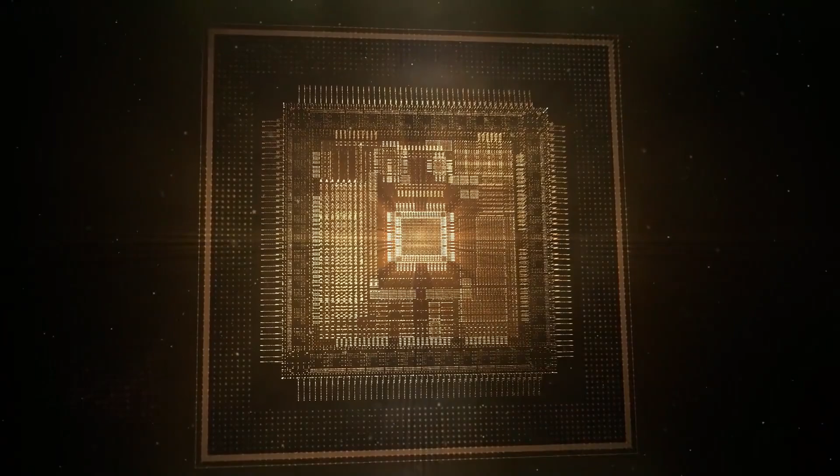Ronnie Chatterjee is one of 130 Indian White House advisors and government officials appointed by Biden after taking office. Previously, he was a professor of business policy at Duke University and served as a senior economics advisor in the Obama administration. It should be said that Chatterjee did show a certain level of professionalism, at least when not dealing with China's internal issues in the United States.

After being appointed as a White House advisor by Biden, the first big thing he took over was dealing with congestion at U.S. ports in 2021. Chatterjee handled this tricky task well, working with the U.S. Department of Transportation and commercial companies, and port congestion was alleviated within months. But Chatterjee's ability may be limited when it comes to dealing with China's internal issues in the United States—when formulating the chip bill, it showed a confusing level of professionalism.

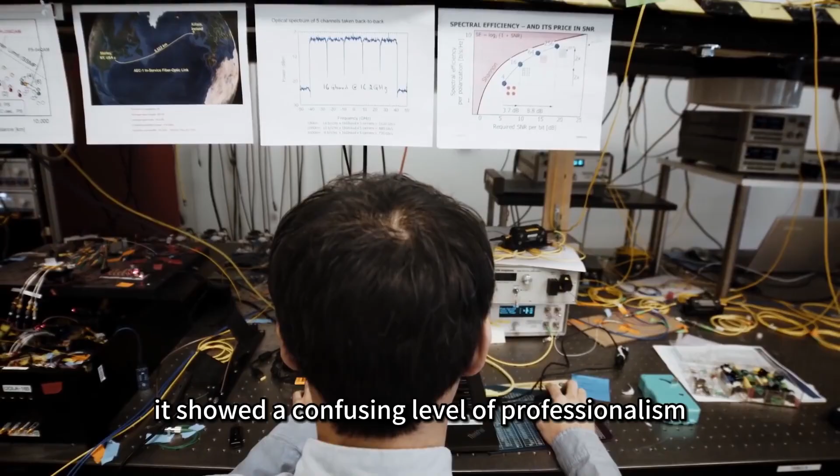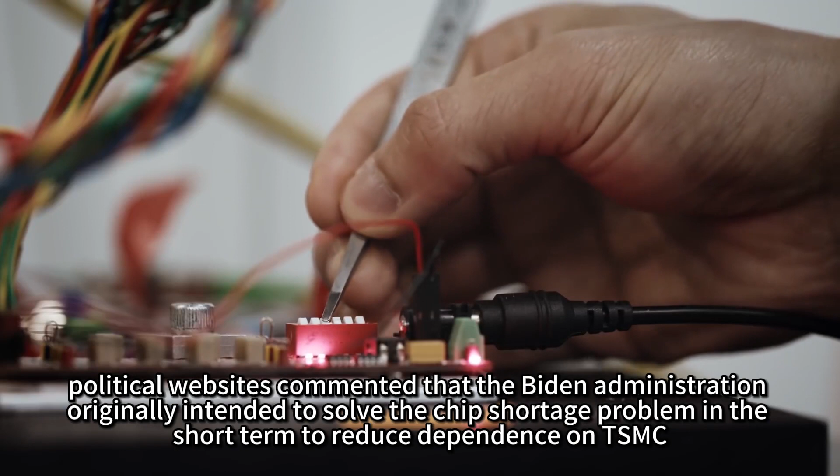There's no need to go into detail on the content of the U.S. CHIPS and Science Act. It mainly forces global chip manufacturers, especially TSMC, to build factories in the United States, and prohibits investment in mainland China. Political websites commented that the Biden administration originally intended to solve the chip shortage problem in the short term to reduce dependence on TSMC. However, in the bill formulated by Chatterjee, it turned into a bet on American manufacturing. Moreover, the bill forces TSMC to move to the United States, which not only angers mainland China, but also becomes a political burden for the United States.

But the problems with Chatterjee's chip bill don't end there. Biden signed the bill very quickly, but the bill had no effect. If chip manufacturers could successfully invest and build factories in the United States, it would be a political achievement for Biden. However, reality contradicted the bill's expectations. Chip giants such as TSMC, Samsung and Intel have invested in and built factories in the United States as required, and the U.S. Congress has also approved $52 billion in subsidies.

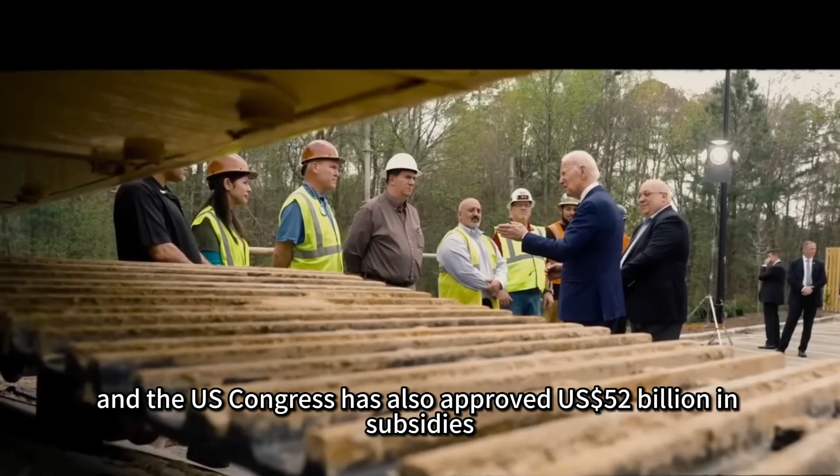However, these U.S. factories have never been able to recruit enough industrial workers. Previously, TSMC's chairman complained in an interview with U.S. media that due to the lack of a large number of skilled semiconductor equipment workers at TSMC's Arizona factory, the startup of the factory may have to be delayed until 2024 or 2025. TSMC has empty factory equipment and no workers in the United States.

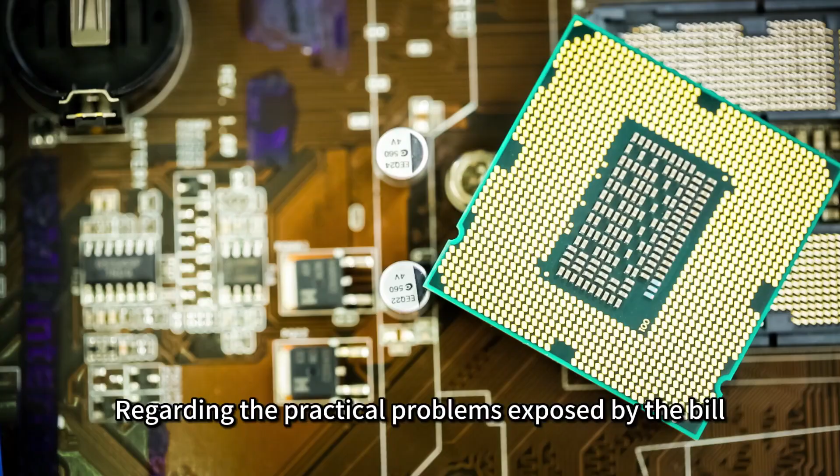In addition, the TSMC chairman also made it clear that although TSMC is investing in building factories in the United States, it will be extremely difficult to replicate another TSMC in the United States. At the end of July, data released by the American Semiconductor Association also confirmed this statement. Data show that by 2030, the number of jobs in the U.S. chip industry will increase to 115,000, but there will be as many as 67,000 vacant positions, a vacancy rate of 58%.

Regarding the practical problems exposed by the bill, Chatterjee has previously admitted that the U.S. chip industry lacks enough industrial workers. He said that everyone hopes that things will get on track, but this is easier said than done.

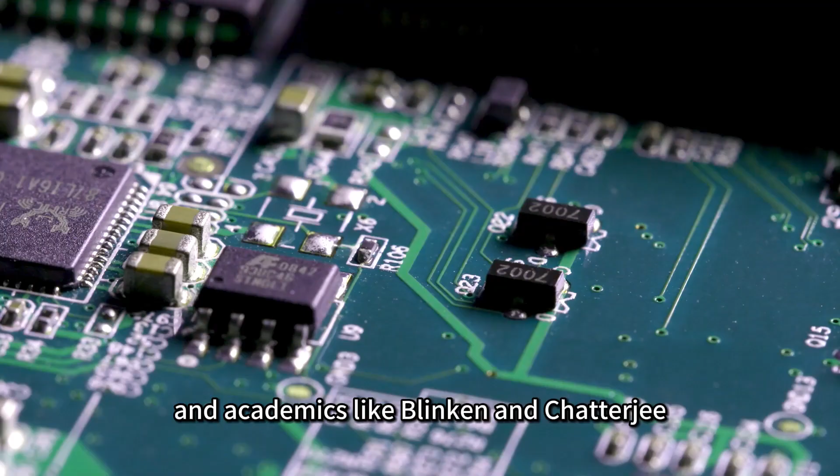In many governments, there are consultants like Chatterjee who do not understand China, pretend to be China experts, and formulate China policies. The most famous is one who cannot even speak Chinese, Zhang Jiadun, who has become a guest of four U.S. governments thanks to street stall literature. As I said before, those who advised the U.S. government during the Cold War were geopolitical masters such as Brzezinski and Kissinger. But who advises the U.S. government now? Charlatans like Bannon and Zhang Jiadun, and academics like Blinken and Chatterjee. This is why it is said that the strategic vision of the U.S. government is getting worse day by day.

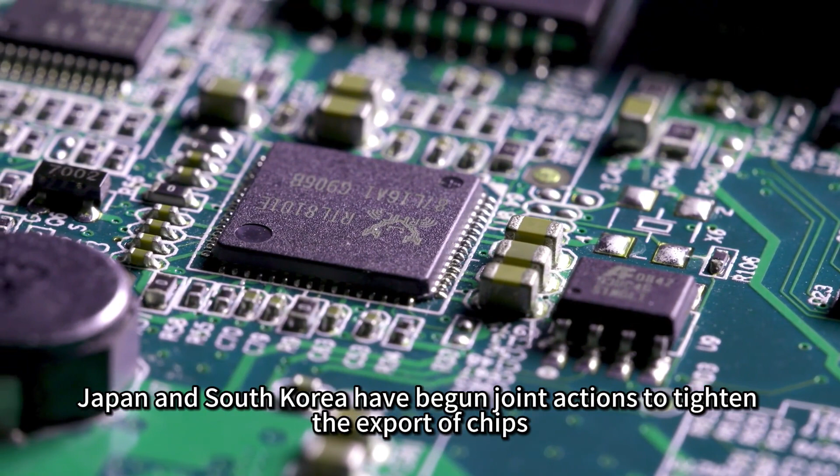Recently, the United States, Japan and South Korea have begun joint actions to tighten the export of chips, semiconductor equipment, materials and other products, with the purpose of hindering the development of China's semiconductor industry. However, it is precisely because of their suspension of supply that Chinese scientists have been determined to conduct self-research and are breaking the relevant technology blockade one by one.

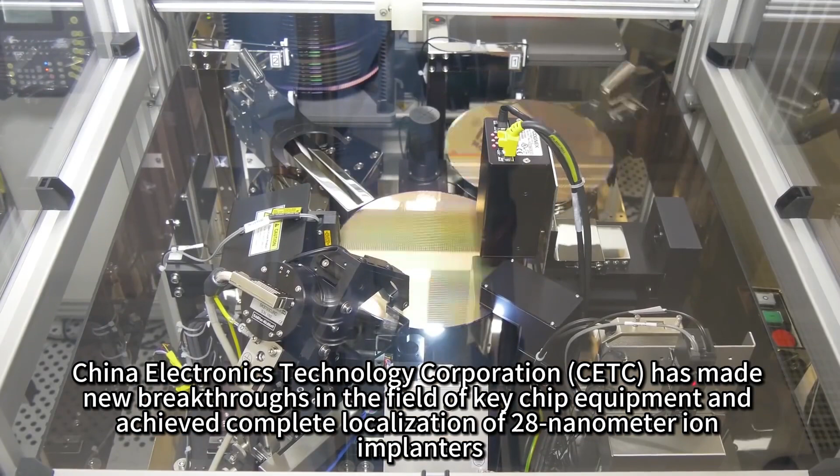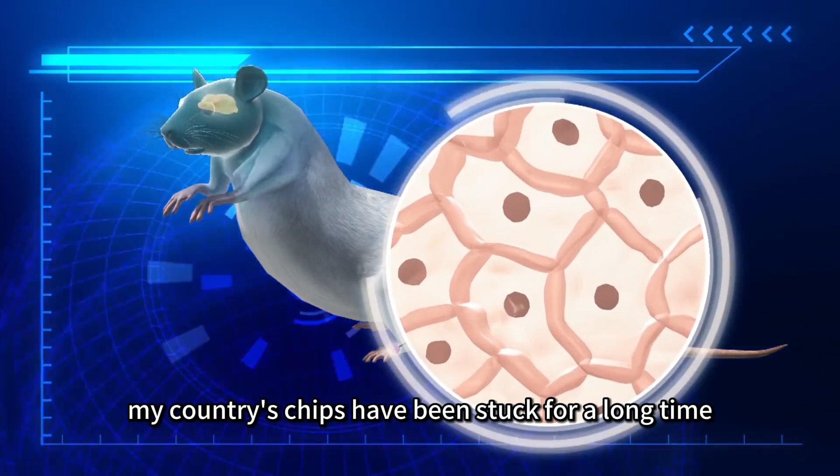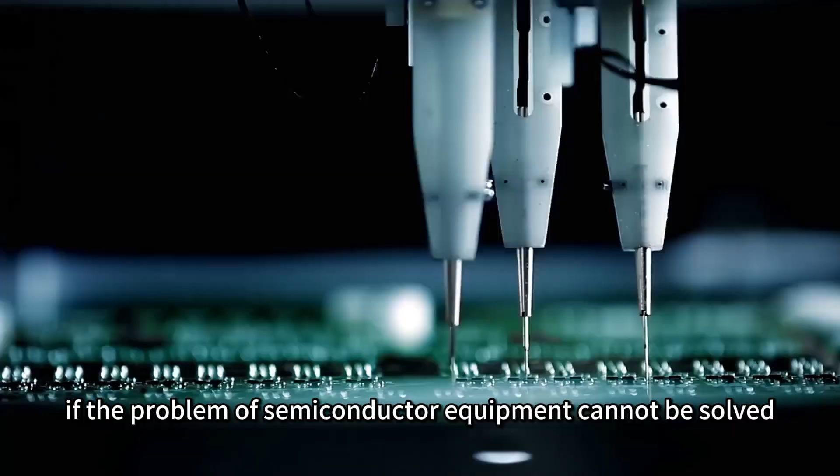Recently, China Electronics Technology Group Corporation (CETC) made new breakthroughs in key chip equipment, achieving complete localization of 28nm ion implanters. On June 29th, CETC announced it had achieved full coverage of the 28nm process for ion implanters. As we all know, my country's chips have been stuck for a long time due to the lack of manufacturing equipment, and we are still unable to mass-produce chips with 7nm and below processes. The recent restrictions imposed by the United States and Japan on semiconductor equipment exports have made things even worse. To put it bluntly, if the problem of semiconductor equipment cannot be solved, domestic chips will stop at 45 nanometers. So the question is, as domestic semiconductor equipment continues to make breakthroughs, how far is it from mass production of 28 nanometer chips?

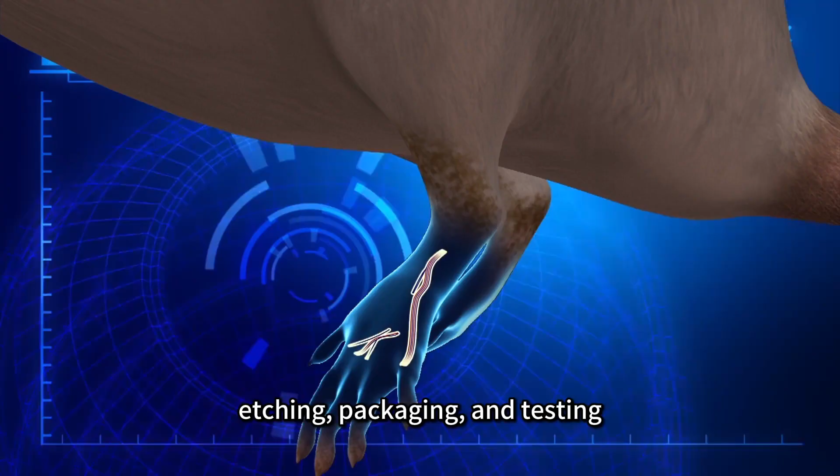How important is semiconductor equipment? A chip goes through hundreds or even thousands of steps from silicon sand to finished product. Simply put, this includes acidification, purification, crystal growth, slicing, polishing, cleaning, glue coating, drying, photolithography, etching, packaging, and testing. These steps require hundreds of types of equipment, among which 9 core equipment are most critical, in order: photolithography machine, etching machine, ion implanter, chemical vapor deposition equipment, chemical mechanical polishing machine, metal evaporation equipment, thin film deposition equipment, cleaning equipment, and testing equipment. To put it bluntly, if any of these equipment types are missing, let alone manufacturing chips, the entire production line will be paralyzed. However, such important equipment is basically monopolized by the United States, Japan, and the Netherlands.

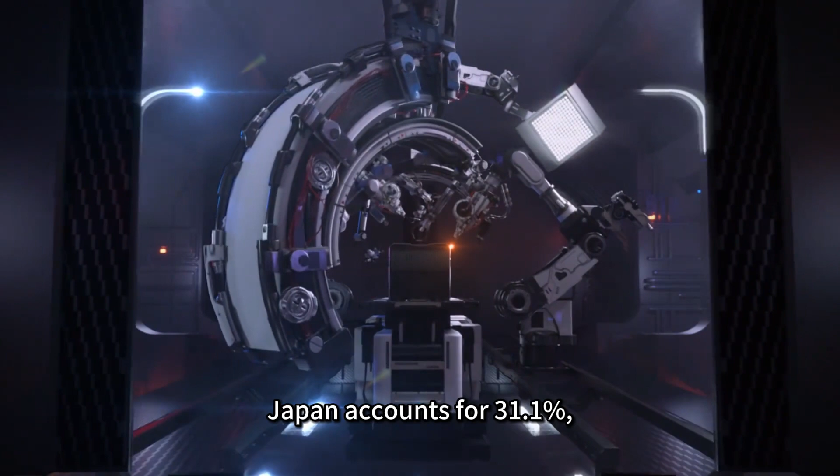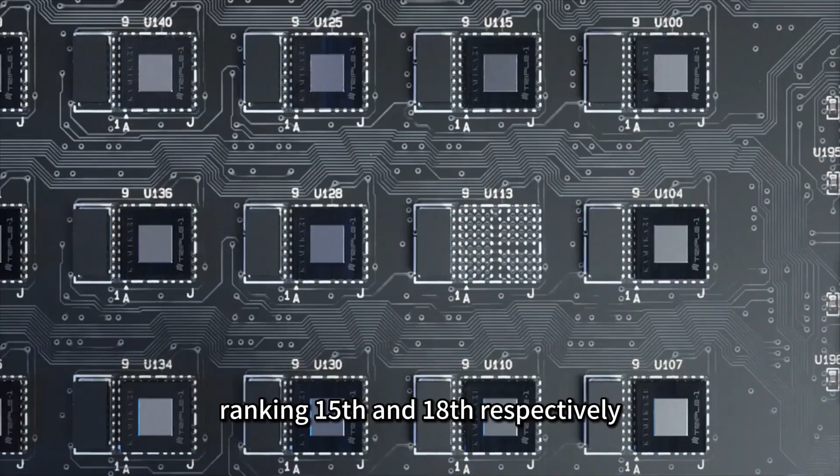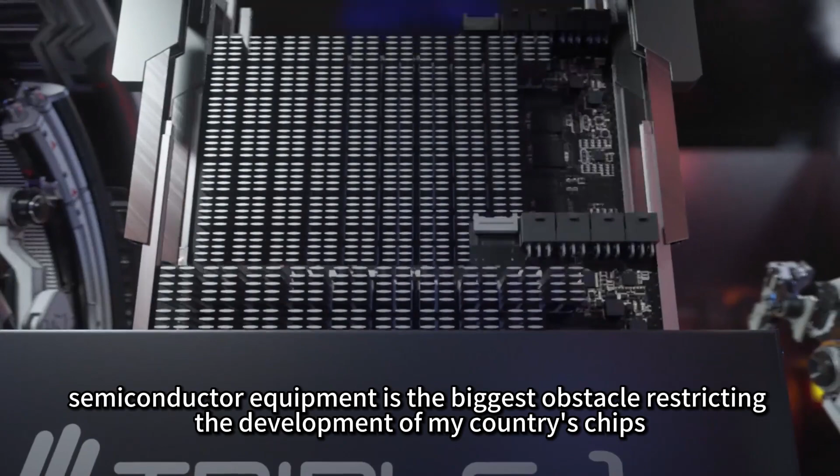Relevant data shows that in the global semiconductor equipment market, the United States accounts for 41.7%, Japan accounts for 31.1%, and the Netherlands accounts for 18.8%. The three collectively control 91.6% of the market share. Among the top 20 semiconductor equipment manufacturers in the world, the top 14 are all overseas companies. Among Chinese companies, only ASMPT and Northern Huachuang are shortlisted, ranking 15th and 18th respectively. Domestic chips are the most backward in terms of equipment. According to the barrel effect, semiconductor equipment is the biggest obstacle restricting the development of my country's chips. To solve the problem of stuck chips, we must first solve the problem of semiconductor equipment. With this premise in mind, let's talk about the 9 core devices.

Again, in the global semiconductor equipment market, the United States accounts for 41.7%, Japan accounts for 31.1%, and the Netherlands accounts for 18.8%, together controlling 91.6% of the market share. Among the top 20 semiconductor equipment manufacturers, the top 14 are overseas companies: Applied Materials of the United States, ASML of the Netherlands, Tokyo Electron of Japan, and Lam Research of the United States are at an absolute advantage. Only ASMPT and Northern Huachuang are shortlisted among Chinese companies, ranked 15th and 18th respectively. The entire chip field includes design, manufacturing, packaging, testing, EDA, equipment, materials, applications, etc. Domestic chips are most backward in terms of equipment. According to the barrel effect, semiconductor equipment is the biggest obstacle restricting the development of my country's chips. To solve the chip stuck-neck problem, we must first solve the semiconductor equipment problem.

With this major premise in mind, we can talk about the 9 core devices. First, the lithography machine. The lithography machine is the core of the core, with a utilization rate of 24% in the manufacturing process. Its classification is as follows.

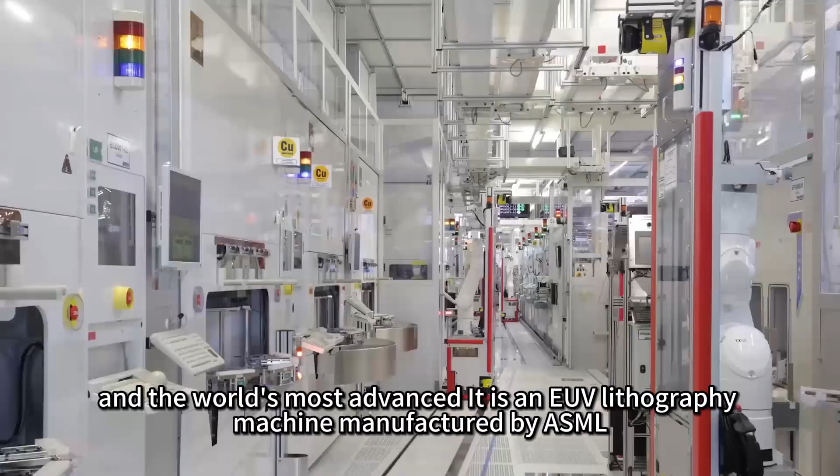The domestic lithography machine currently available is the 90 nanometers lithography machine produced by Shanghai Microelectronics, and the world's most advanced is an EUV lithography machine manufactured by ASML. Calculated according to the chip manufacturing process, the difference between the two is 6 generations. Calculated according to time, the difference is 28 years.

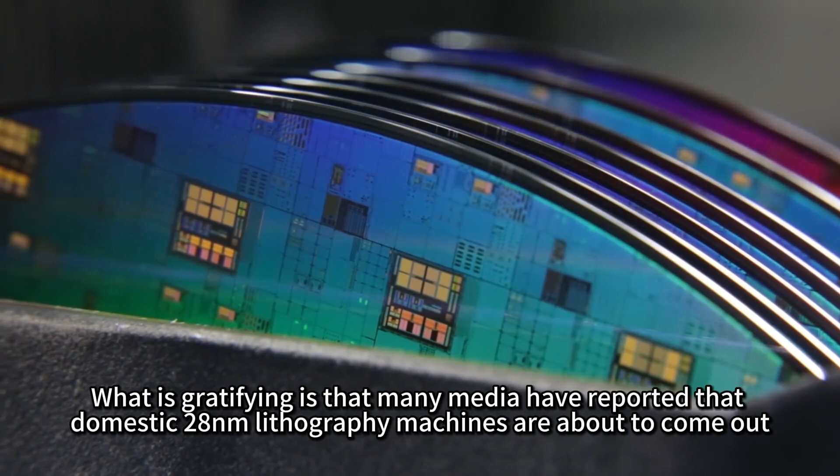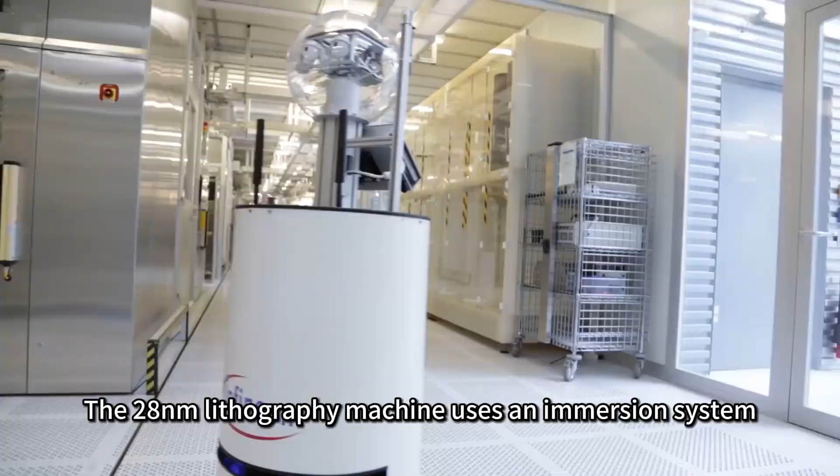What is gratifying is that many media have reported that domestic 28 nanometers lithography machines are about to come out, and sample machines have even been produced. The 28 nanometers lithography machine uses an immersion system, equivalent to ASML's ArFi lithography machine, but the resolution can currently only reach 28 nanometers. Its key components are all manufactured by domestic companies.

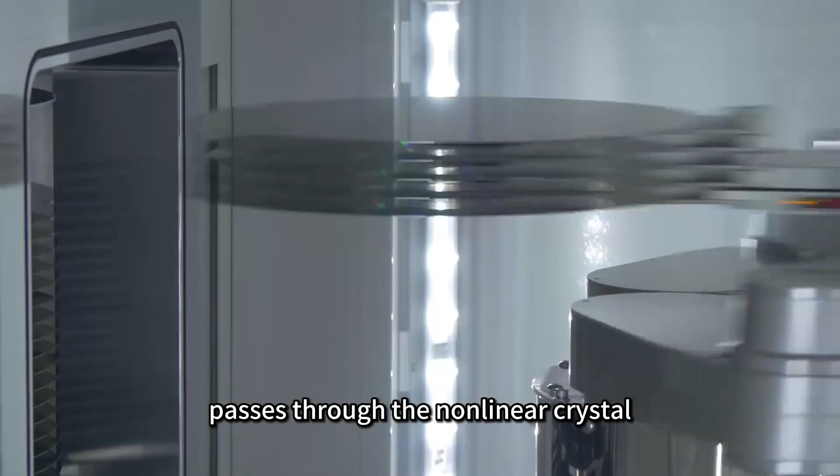Light source, built by Beijing Keyi Hongyuan, based on the ArF excimer laser, obtains 579 nanometers fundamental frequency light, passes through the nonlinear crystal, obtains 289.5 nanometers frequency doubled laser, and further obtains 193 nanometers tripled ultraviolet laser.

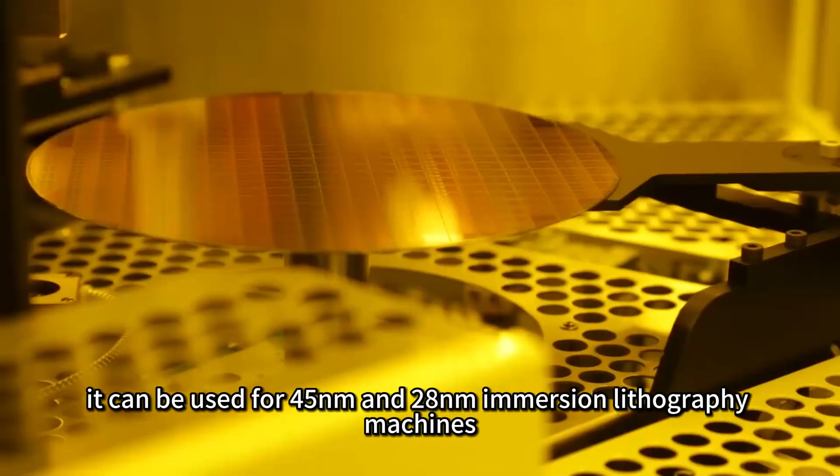Dual workbench, jointly built by Tsinghua University and Huazhuo Precision Technology, can be used for 45 nanometers and 28 nanometers immersion lithography machines. It can be used for processes below 14 nanometers and 7 nanometers after future upgrades.

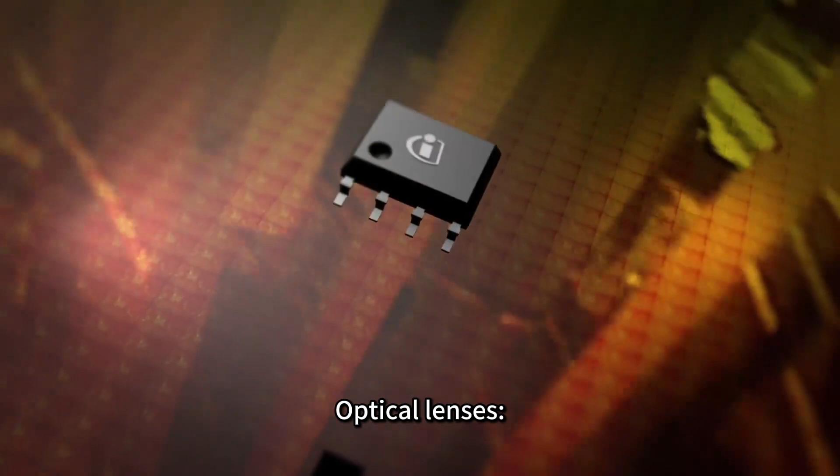Immersion system, built by Zhejiang Qier Electromechanical, its precision is second only to ASML and Japan's Nikon. The temperature stability error reaches 0.001 degrees, in line with international advanced level, meeting 28 nanometers lithography technology requirements. Optical lenses, manufactured by the Changchun Optics Machinery Institute of the Chinese Academy of Sciences, fully meet the requirements of the 28 nanometers lithography machine, but there is still a huge gap with Zeiss.

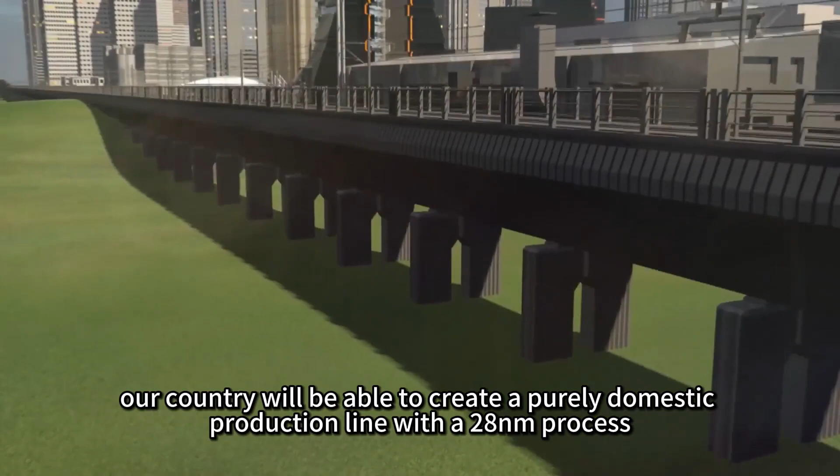If the 28 nanometers lithography machine breaks through, our country will be able to create a purely domestic production line with a 28 nanometers process. Don't underestimate the 28 nanometers process.

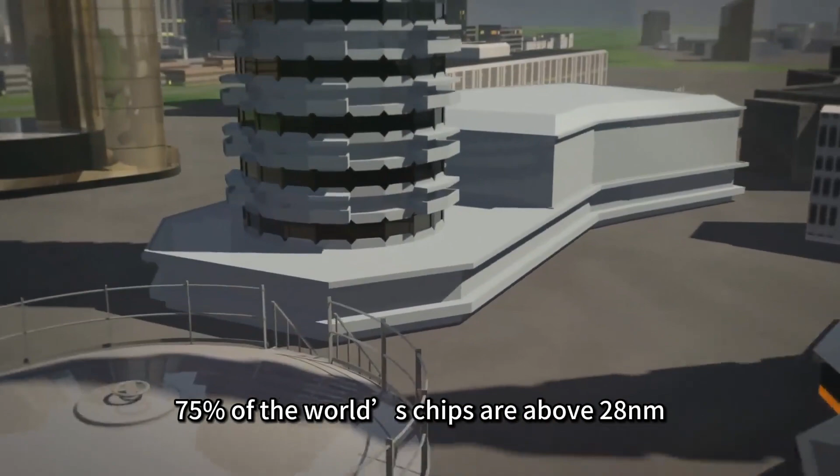Currently, 75% of the world's chips are above 28 nanometers. Only a small number of scenarios such as smartphones, supercomputers, and high-end GPUs pursue 7 nanometers or below. The value of my country's chip imports every year reaches 2.8 trillion yuan, accounting for more than 70% of global chip sales. In order to obtain this part of the profits, the United States continues to restrict and suppress China.

If we raise the level of technology to a higher level, the effect of the game will be very different. Assuming that in 2025, we can build a purely domestic 7 nanometers production line, the chip game will become chip cooperation. The second, etching machine: the photolithography machine is the weakest link in my country's semiconductor equipment, and the etching machine is the strongest link.

Domestic etching machines have reached a replacement rate of 30%, represented by companies such as China Micro Semiconductor and Northern Huachuang. At present, the etching machines produced by China Micro Semiconductor have reached the 5 nanometers level, and the company's products have been successfully supplied to TSMC, the leading chip OEM.

Being recognized by TSMC is equivalent to obtaining a global license. At present, China Micro Semiconductor has begun the research and development of 3 nanometers equipment, and is bound to win the first place in the world. However, the embarrassing thing is that China Micro Semiconductor does not have much profit.

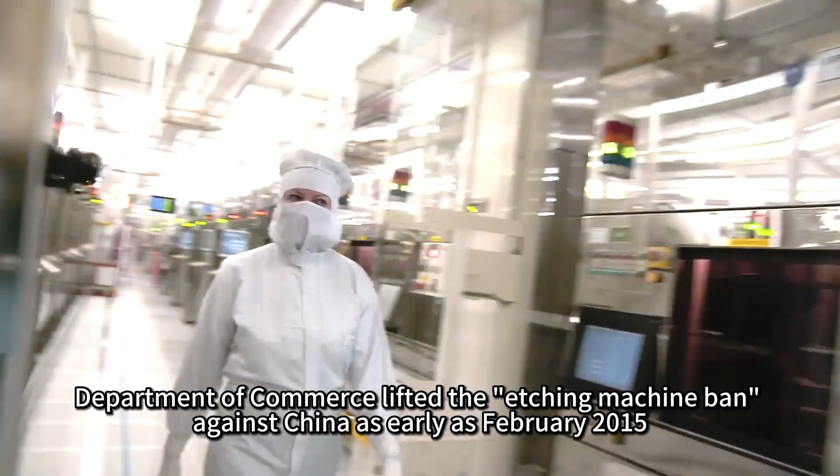Because the U.S. Department of Commerce lifted the etching machine ban against China as early as February 2015. The reason is that China has actually obtained etching equipment from Chinese companies equivalent in quantity and quality to American products, making it meaningless to continue national security export control measures. After the ban was lifted, many manufacturers still chose overseas equipment as more suitable. This has also resulted in the global share of AMEC being only 1.4%.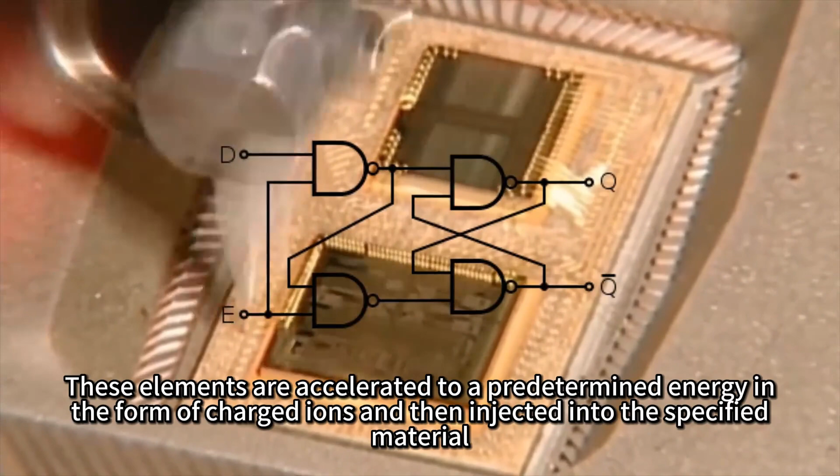The third one is the ion implanter. During the chip manufacturing process, different types of elements need to be incorporated to change the electrical properties of the material. These elements are accelerated to a predetermined energy in the form of charged ions, and then injected into the specified material. This process requires an ion implanter to perform.

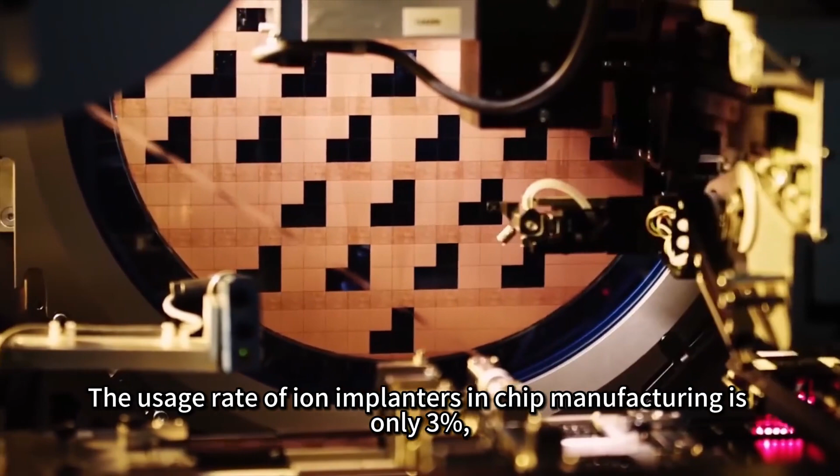The usage rate of ion implanters in chip manufacturing is only 3%, and the market share is only about $2 billion. However, without this 3%, the remaining 97% would be useless. However, in this field, American companies have won 89% of the market share, and have an absolute monopoly. Ion implanters have become the second shortcoming of domestic semiconductor equipment.

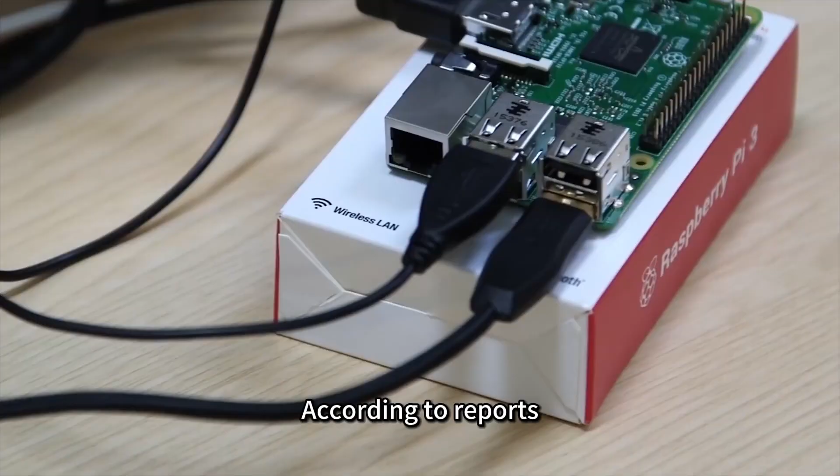Today, good news comes from CETC. The company has achieved full coverage of the 28 nanometers process for ion implanters, according to reports. CETC has continuously made breakthroughs in core technologies of key modules such as optical circuits, control, and software, forming a full range of ion implanters for medium beam, large beam, high energy, and third-generation semiconductors.

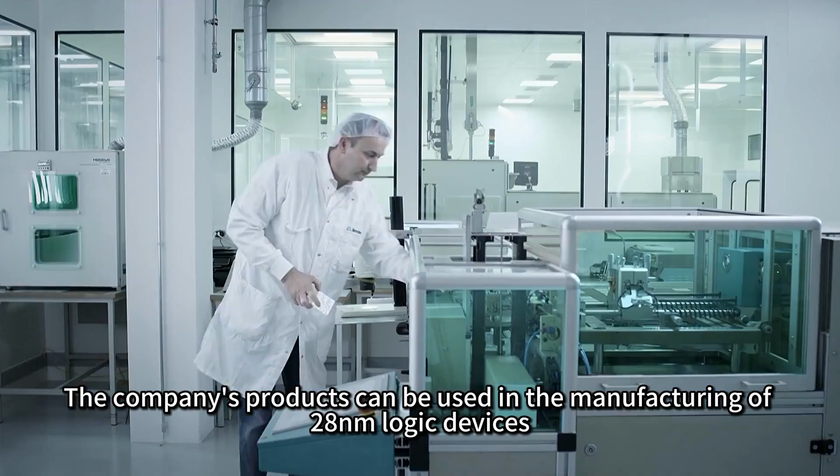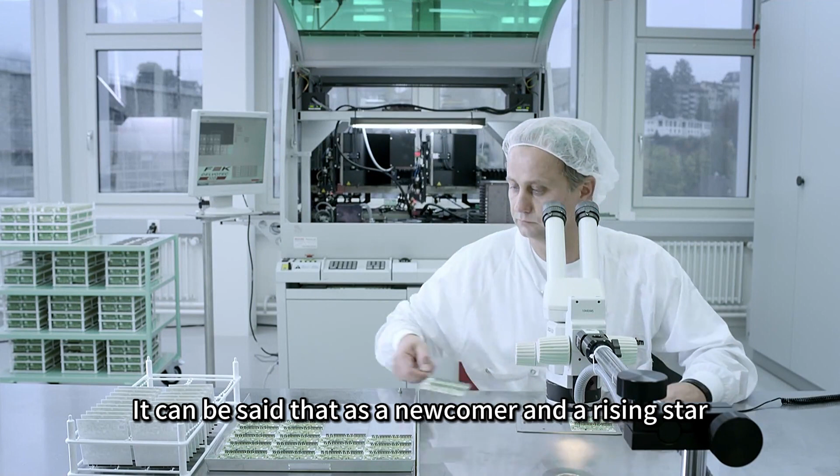The company's products can be used in the manufacturing of 28 nanometer logic devices, memory devices, power devices, sensors, etc., and the cumulative tape-out exceeds 20 million pieces. As a newcomer and rising star, it is very rare to break through 28 nanometers.

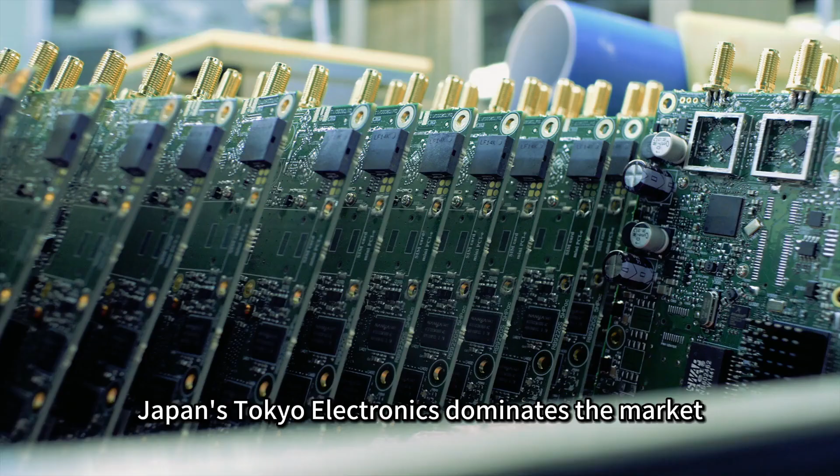Although there is no market share, at least the stuck neck of mature processes has been solved. The fourth is the glue coating developing machine, mainly used for photoresist coating and development of photolithography patterns. It uses a robotic arm to complete photoresist coating, curing, development, film hardening and other processes of the wafer. It directly affects the subsequent exposure quality of the circuit, and also has a profound impact on etching and ion implantation. In the global market, Japan's Tokyo Electron dominates, occupying 87% of the market share, in an absolute monopoly position.

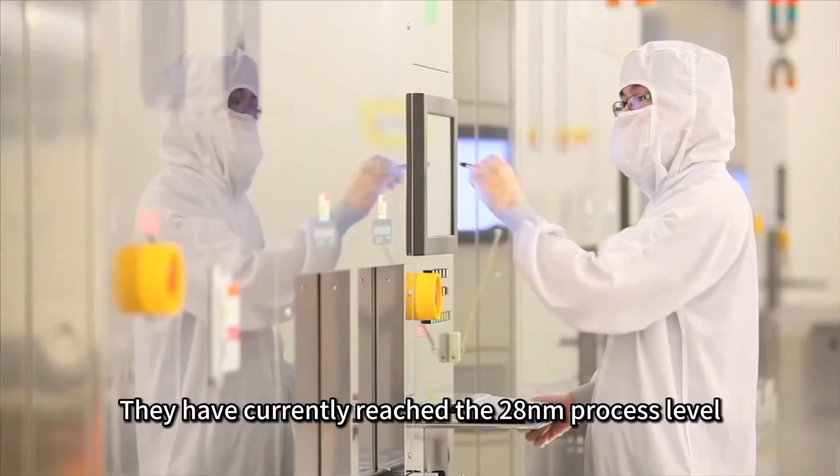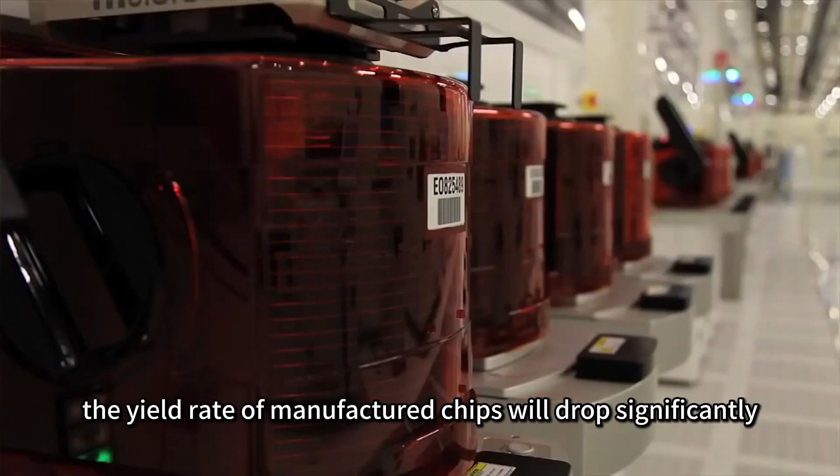Fifth, cleaning equipment. Cleaning equipment must clean away charged ions and metal impurities from the wafer, otherwise the yield rate of manufactured chips will drop significantly. On paper, the cleaning equipment may not look like much, but in fact it is an extremely sophisticated piece of equipment. The precision of the cleaning equipment can reach the nanometer level.

1 nanometer equals 0.000001 millimeter. What impurities will exist in a 5 nanometer gap? You can imagine the difficulty of washing these. Domestic companies mainly include Shengmei Shanghai and Zhichun Technology. These companies have complete industrial chains and advanced technologies, and have basically achieved 50% domestic substitution.

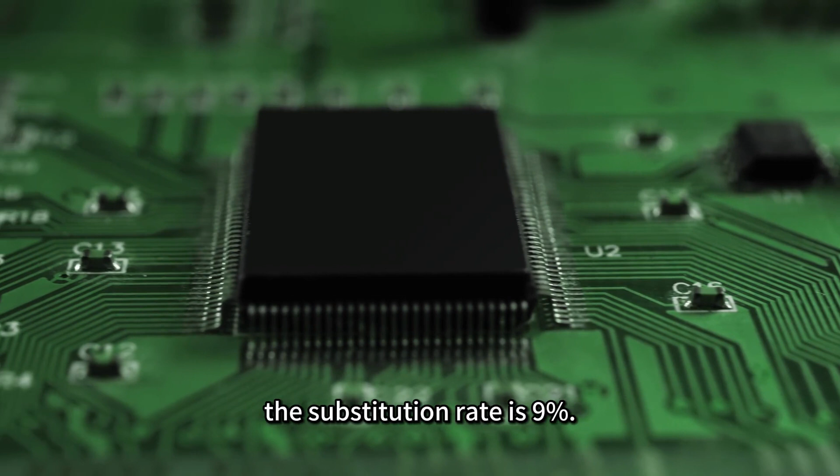Chemical mechanical polishing machine is one of the equipment used to flatten the surface of silicon wafers. It removes uneven parts of the silicon wafer surface through chemical reaction and mechanical friction to form a flat surface. The domestic representative company is Huahai Qingke, with a replacement rate of 20%.

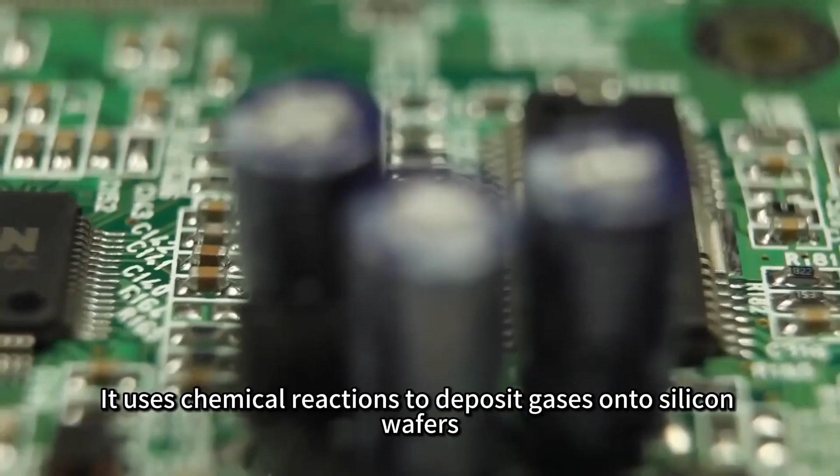Chemical vapor deposition equipment, or thin film deposition equipment, is used to manufacture thin films. It uses chemical reactions to deposit gases onto silicon wafers, forming very thin films. This film can be used to make components such as capacitors and resistors. The process is simple, the application range is wide, the equipment is simple, and the technical requirements are low, but it is polluting. Domestic representatives include Tuojing Technology, Northern Huachuang, and Shengmei Shanghai, with a replacement rate of 13%.

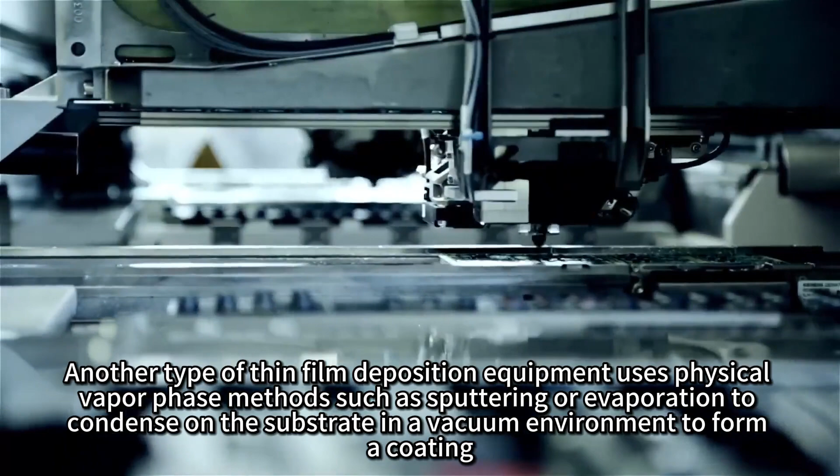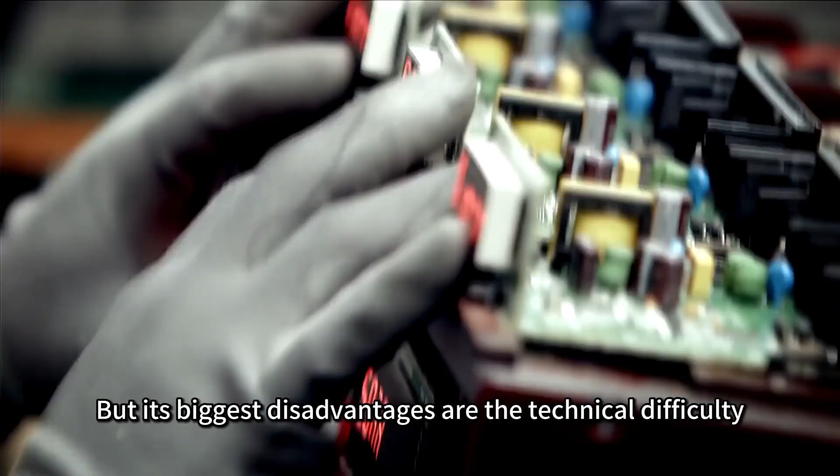Another type of thin film deposition equipment uses physical vapor phase methods such as sputtering or evaporation to condense on the substrate in a vacuum environment to form a coating. This process has the advantages of high hardness and strength, good thermal stability, good wear resistance, stable chemical properties, low friction coefficient, dense organizational structure, and is green and pollution-free. But its biggest disadvantages are technical difficulty, high cost and complex process. Domestic substitution is mainly made by Northern Huachuang, with a substitution rate of 10%.

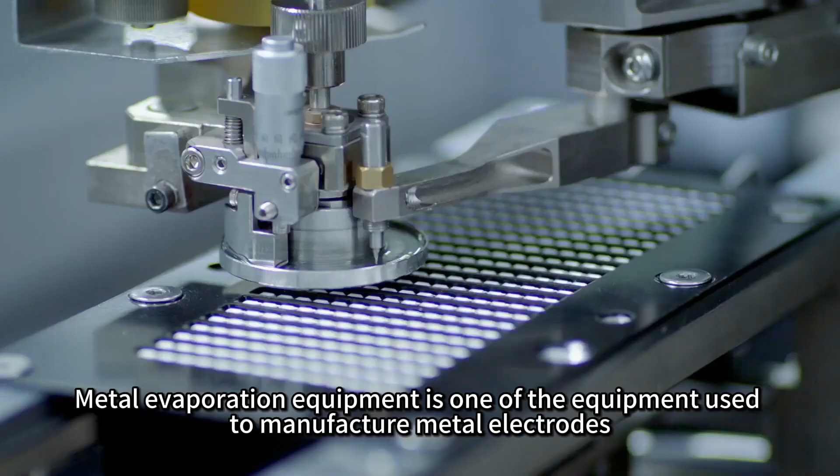Metal evaporation equipment is one of the equipment used to manufacture metal electrodes. It uses high temperatures to evaporate metal onto a silicon wafer to form electrodes. This equipment is very important for making metal electrodes.

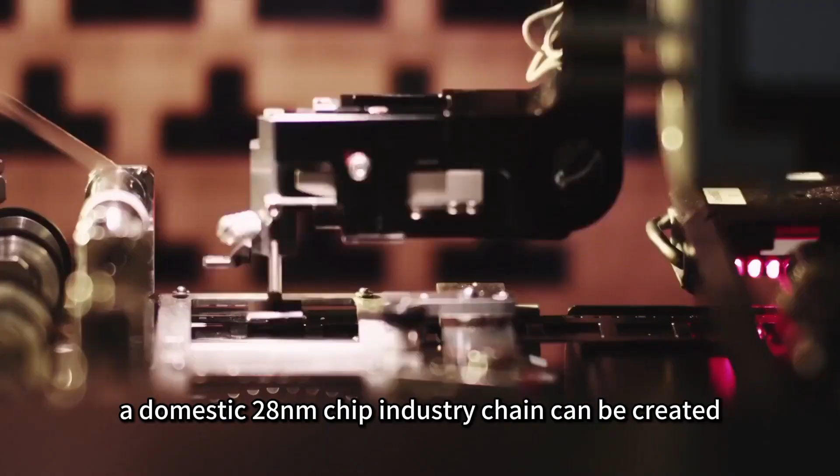Overall, domestic chip equipment replacement rate reaches 80%. As long as the 28 nanometer lithography machine is conquered, a domestic 28 nanometer chip industry chain can be created, right to the end. With the breakthrough of the 28 nanometer ion implanter, only the photolithography machine has yet to break through among the 9 core equipment.

According to market news and the angry remarks of the ASML president, it can be seen that domestic 28 nanometer lithography machines are close to a breakthrough, but this is only the first step in a long march, and it is still far from full success. After all, TSMC has achieved mass production of 3 nanometer chips, while SMIC is still at the 14 nanometer stage.

At the end of last year, TSMC held a 3 nanometer production and expansion ceremony at the Tainan Science Park, officially announcing the launch of 3 nanometer mass production. Previously, Samsung had announced the start of 3 nanometer process production as early as June. TSMC originally planned to officially mass produce in September, but due to some reasons it was postponed to the end of the year.

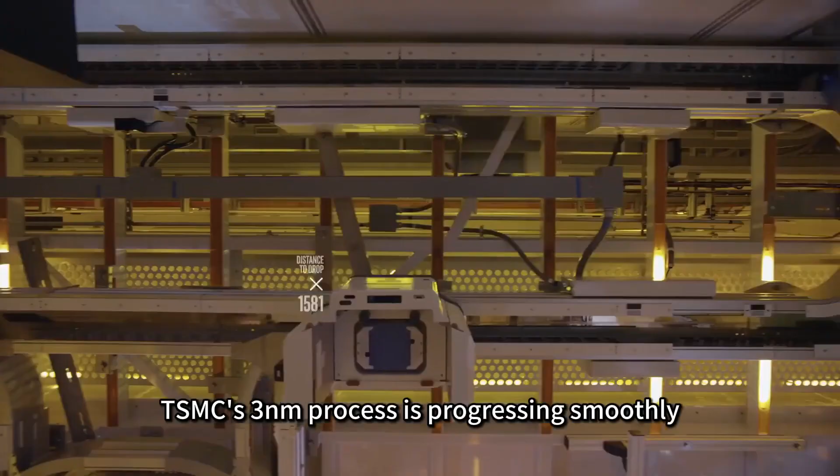Today, TSMC's 3 nanometer process is progressing smoothly, and news about 2 nanometer process technology has also come out. According to reports, Nanke Chip Factory 18 is the production base of TSMC's 5 nanometer and 3 nanometer chips, with phases 5 to 9 being the 3 nanometer production base. According to TSMC President and co-CEO Wei Zhejia's previous statement, TSMC's N3 process progress is in line with expectations and will be mass-produced in the second half of 2022 with a good yield rate, driven by HPC and smartphone-related applications.

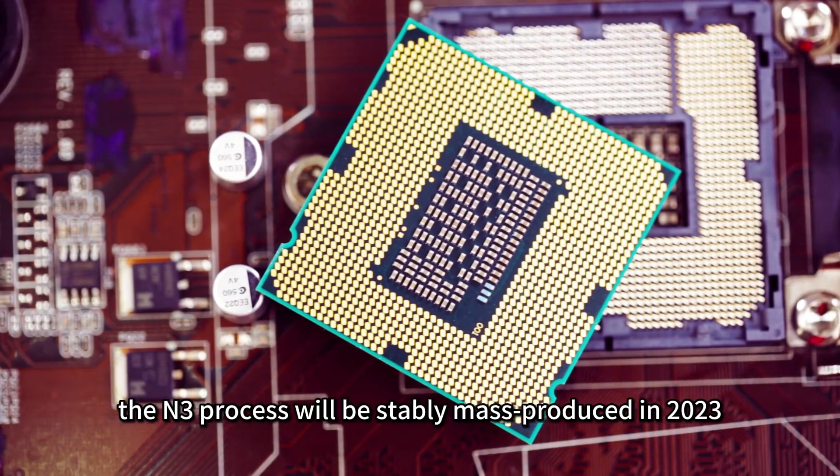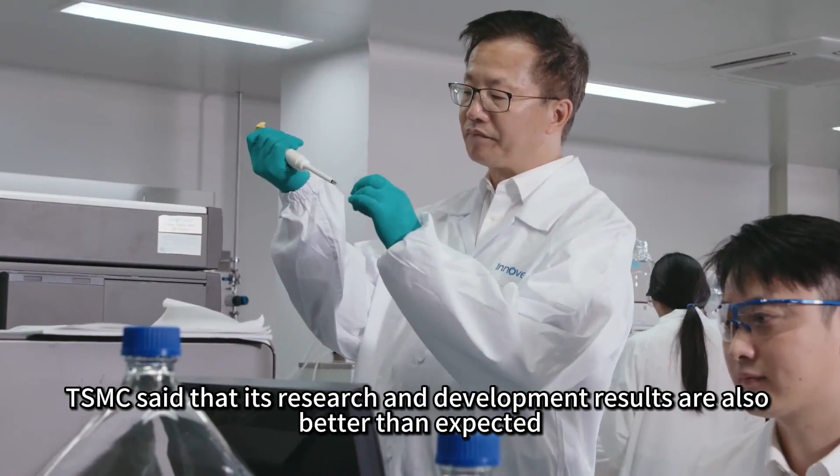The N3 process will be stably mass-produced in 2023. On the enhanced version of the 3 nanometer process, TSMC said that its research and development results are also better than expected and will have better performance, power consumption and yield rate, and can provide complete platform support for smartphones and HPC-related applications in the 3nm era. The N3E process is also expected to enter mass production in the second half of 2023.

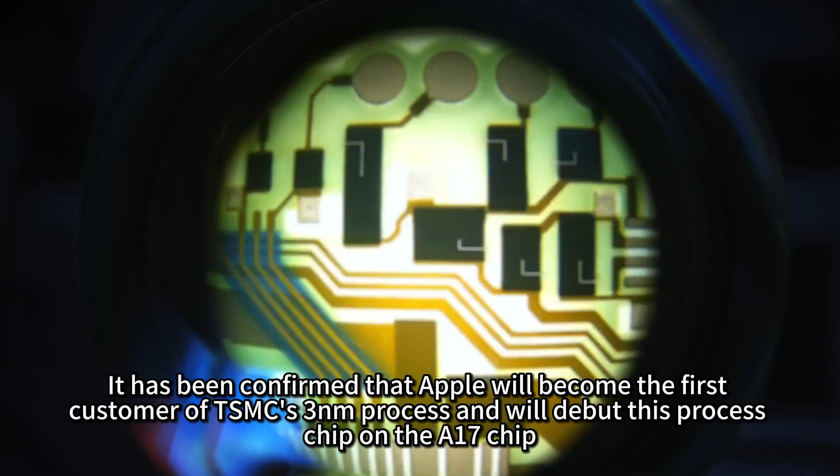It has been confirmed that Apple will become the first customer of TSMC's 3nm process, and will debut this process chip on the A17 chip.

At the same time, there is news that TSMC's original 3nm customer was Intel. However, due to the delay of Intel's Meteor Lake core display order, this move has greatly impacted TSMC's production expansion plan, resulting in only the first wave of customers remaining for the 3nm process from the second half of this year to next year—Apple's products, including M-series chips and A17 chips. Therefore, TSMC has decided to slow down its production expansion progress to ensure the production capacity does not cause cost pressure due to excessive idleness.

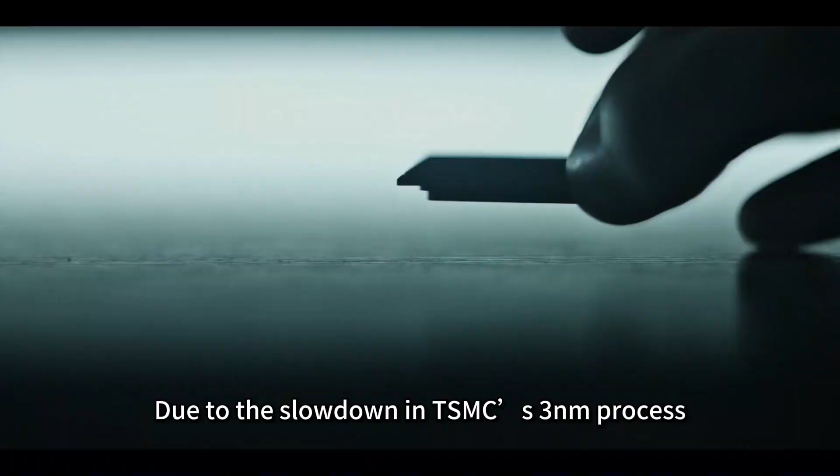However, there is news that the M3 series of chips originally planned to be launched this year has also been postponed to next year. Due to the slowdown in TSMC's 3nm process, Apple will give priority to ensuring sufficient supply of A17 chips.

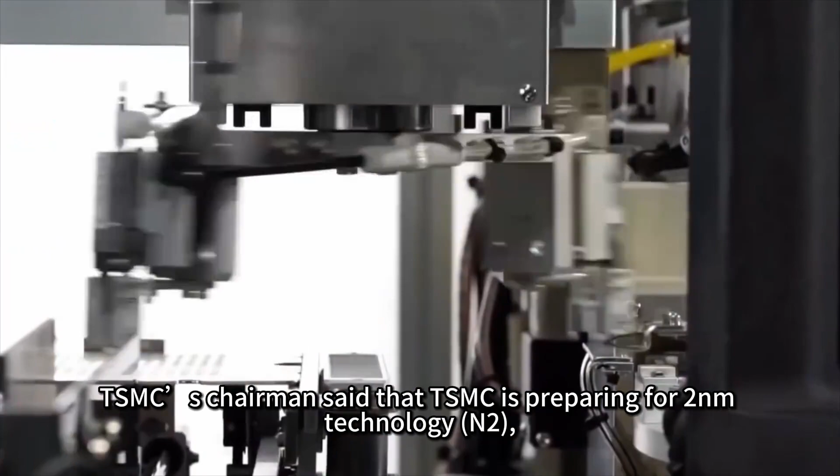In addition, TSMC mentioned details about the next-generation 2nm process in its annual report submitted to shareholders. TSMC's chairman said that TSMC is preparing for 2nm technology, N2, which is expected to start mass production in 2025. The process technology will be produced in Hsinchu and Taichung Science Park. 2nm technology will adopt a nanosheet transistor structure and provide full node performance and power efficiency benefits compared with N3E.

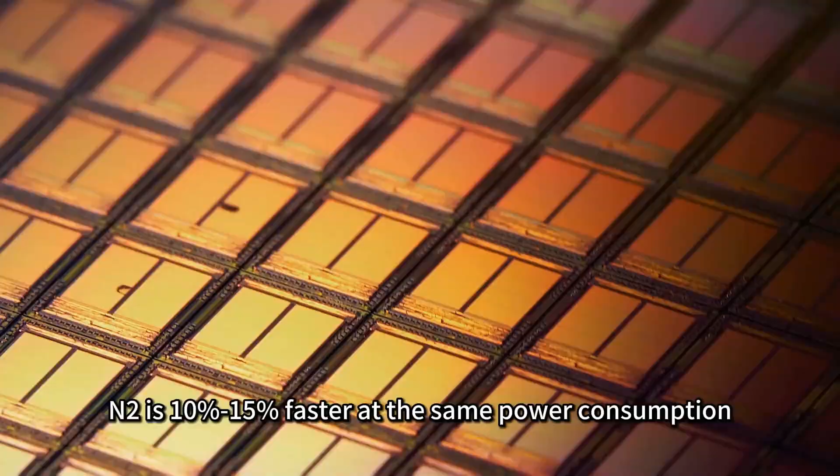N2 is 10%-15% faster at the same power consumption, or 25%-30% lower power at the same speed, to meet the increasing demand for energy-saving computing. TSMC also stated that N2 technology research and development is advancing in an orderly manner and will be trial-produced in 2024 and mass-produced in 2025.

At the same time, the N4 process has also been put into mass production last year. TSMC also launched the N4P and N4X processes, gradually bringing more advanced technologies to each process. In the second half of this year, the N3E process with higher performance, lower power consumption and higher yield will also be mass-produced. However, only the Apple A17 chip will use the 3nm process this year, which also makes the iPhone 15 series particularly competitive this year.

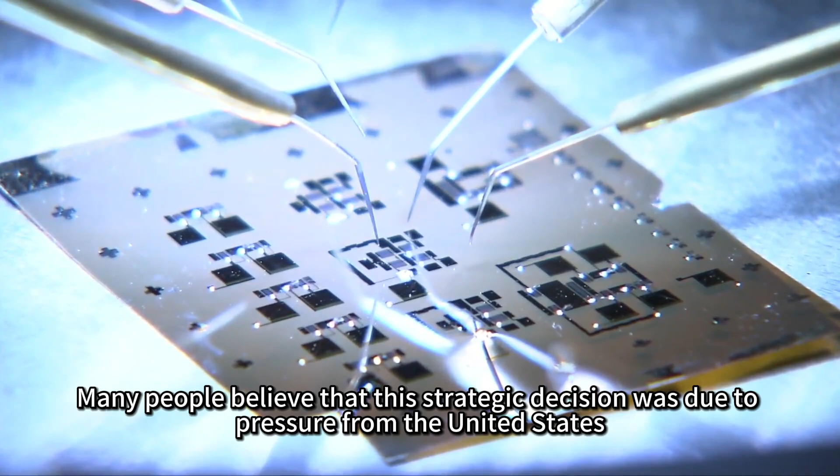On the other hand, SMIC announced that it will no longer produce 14nm chips and will instead invest all its production lines in 28nm chips. Many people are speculating on the reason. Many believe this strategic decision was due to pressure from the United States, and that SMIC could not withstand such pressure, so it was forced to remove the 14nm process.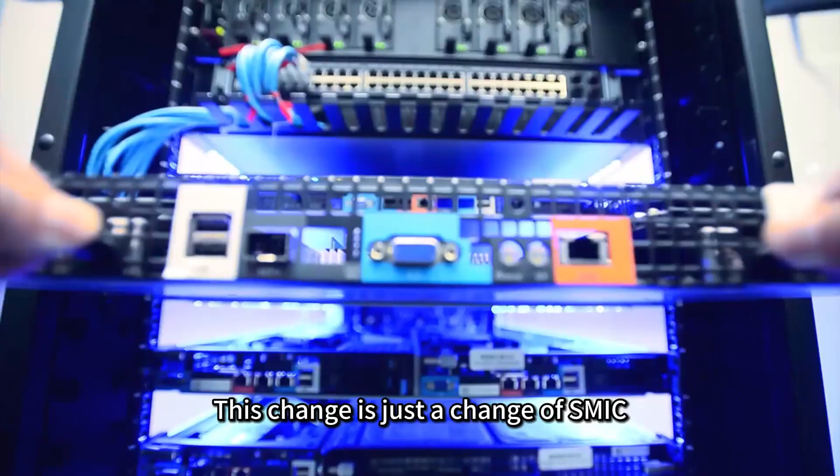Faced with the changes in SMIC's situation, foreign media gloated that the sanctions imposed by the United States had worked. This time, SMIC switched from 14nm chip production to 28nm chip production—it is definitely not as feared by US sanctions as foreign media said. How could the Chinese surrender without a fight? This change is just a shift in SMIC's development strategy, a different angle to break through the US technological blockade and find a new path for China's chip development.

If you want to make a chip well, you must first start with the optical chip machine that manufactures the chip. This kind of machine was previously in the hands of the Dutch. The Netherlands created an ASML company to specialize in the production of optical machines.

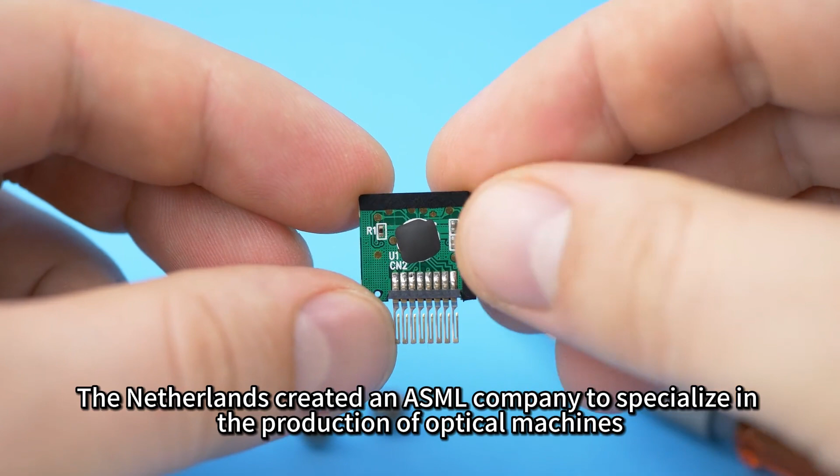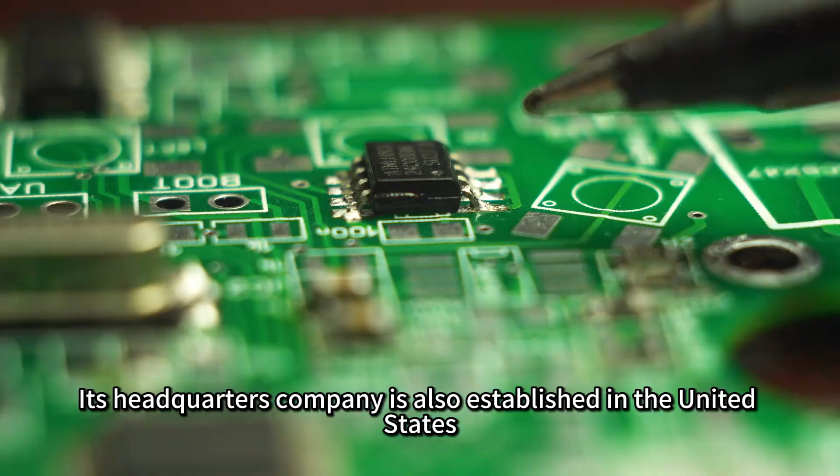This company is not rational. It often follows the guidance of the United States and restricts the export of lithography machines to my country. Its headquarters is also established in the United States, so it is not easy to obtain chip manufacturing machines from ASML. In this case, our country seems to have no way out from the beginning.

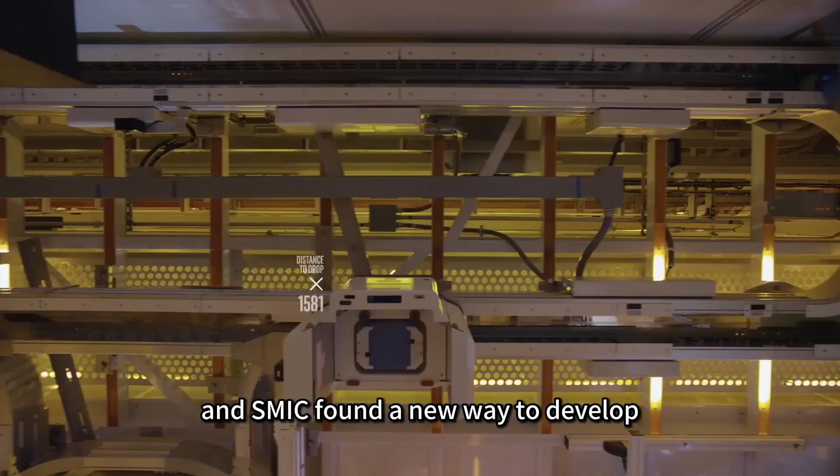If we start to develop photolithography machines now, it will waste a lot of time, and it may not be successful. So does SMIC really have no way out? At this time, the wisdom of the Chinese people came to the fore, and SMIC found a new way to develop.

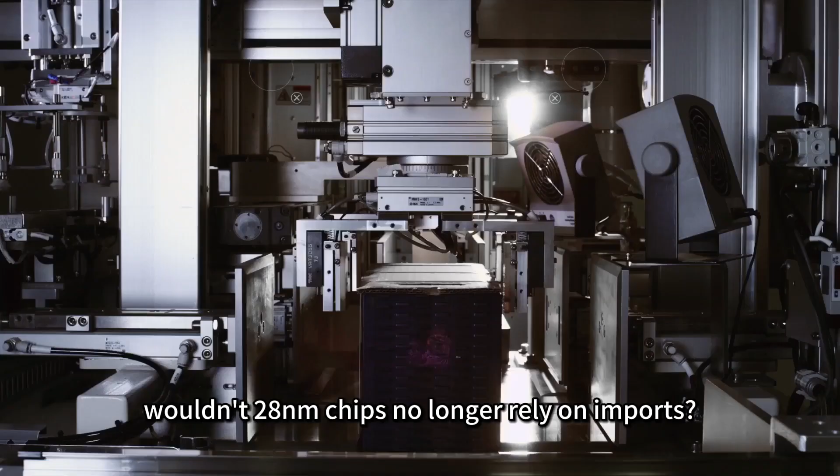Since my country's existing technology cannot mass-produce 14 nanometers, why not produce 28 nanometer chips first? At present, 28 nanometer chips are widely used in our country, but still rely on a large amount of imports. If our country can mass-produce 28 nanometer chips, wouldn't 28 nanometer chips no longer rely on imports? SMIC saw this chip gap, and decided to switch to 28 nanometer chips.

If there is still no progress in technological breakthroughs, it is better to master the technology that you are very proficient in first, and use this technology to satisfy the domestic market and fill the gap. If this is done well, the scale of the enterprise will gradually increase, and its strength will become stronger and stronger. At this time, SMIC will have greater strength to invest in scientific research and innovation.

It is difficult for foreign media to understand this kind of Chinese wisdom. They will only fabricate what they see with their own eyes, and will not understand the essence of what happened behind the scenes. What SMIC did was just a wise move, based on national conditions and domestic market demand.

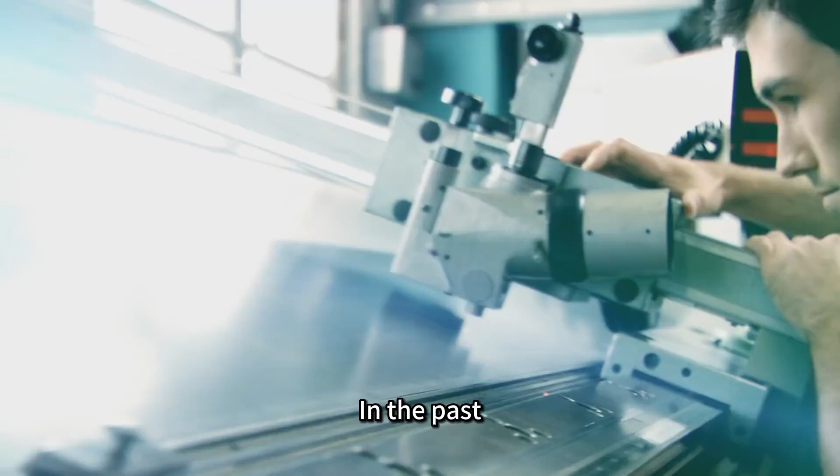In the past, Huawei also used this kind of Chinese wisdom to step-by-step withstand the US blockade, and rely on the support of the country to break out of the encirclement. This is the characteristic of Chinese enterprises. They are neither arrogant nor impatient, but move forward step by step.

Don't look forward or backward, focus only on the development of the enterprise, and take every step slowly, just so that one day, you can encounter the opportunity, seize it tightly, and then turn around, and you will be bright, and bright from now on.

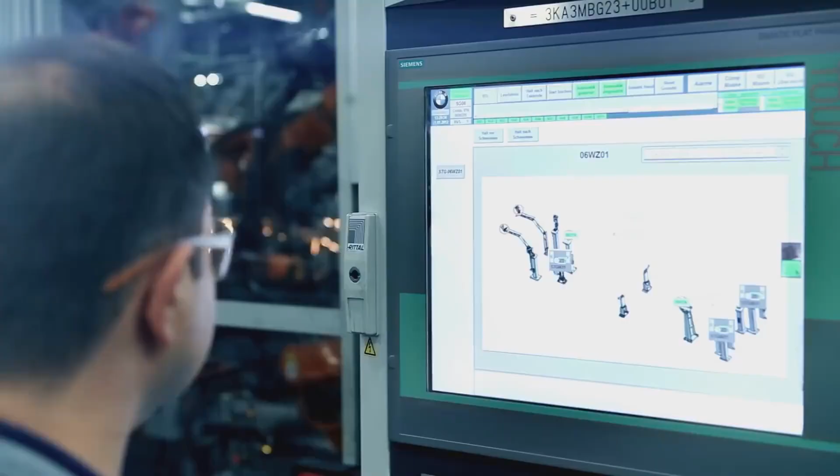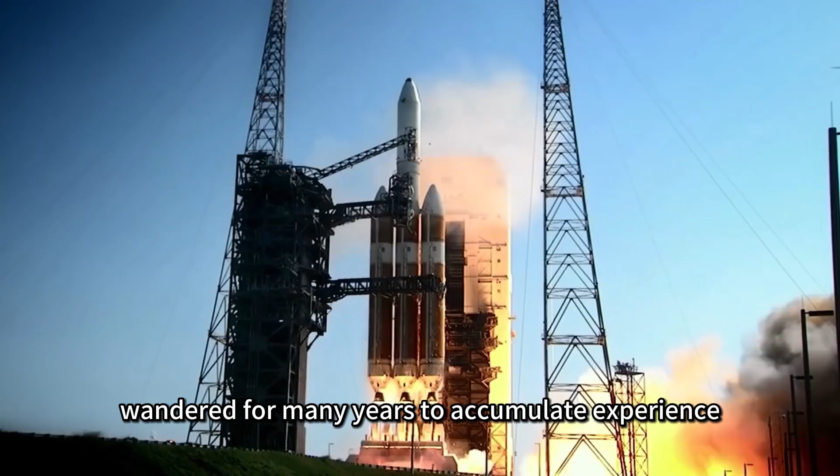I don't know if it's a coincidence or something, but many of the world's biggest names in the chip industry are from our treasure island, Taiwan. For example, Zhang Zhongmou, the founder of TSMC, first studied in the United States, wandered for many years to accumulate experience, and then returned to Taiwan to establish TSMC.

There is also the founder of NVIDIA, Jensen Huang, who lived in Taiwan before he was 9 years old. He just came to the United States and started studying. Even Zhang Rujing, the founder of SMIC, was born and raised in Taiwan province.

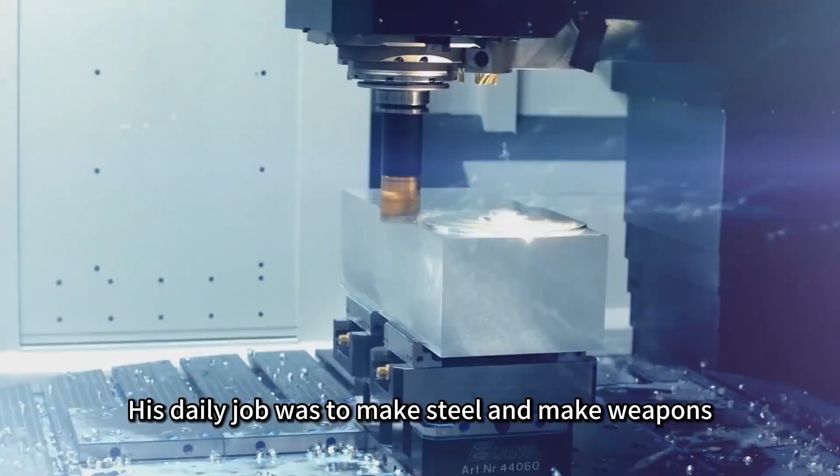In fact, Zhang Rujing being like this is inseparable from the teachings of his father Zhang Zilan. Zhang Zilan was a senior employee of the Kuomintang military factory during the Liberation War. His daily job was to make steel and make weapons, and he was very patient with his apprentices. It was under his words and deeds that Zhang Rujing developed such great ambitions as he has today.

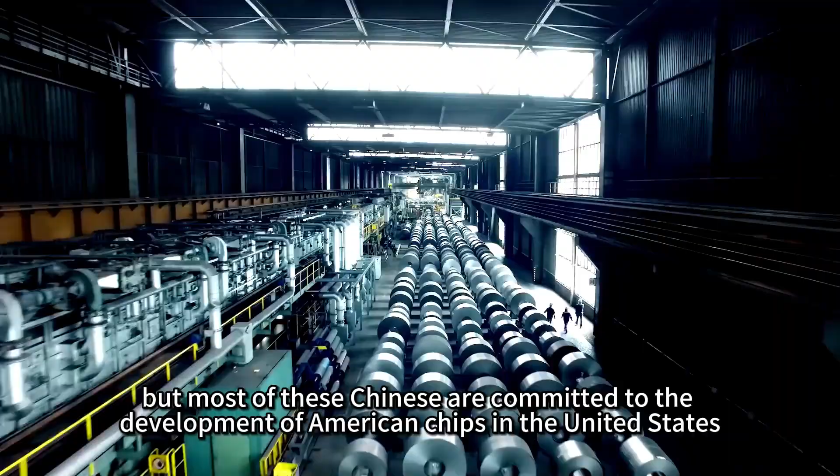Nowadays, Chinese are not uncommon among those who have laid the foundation for chip development, but most of these Chinese are committed to the development of American chips in the United States. We can't complain about them even if their positions are different. But one thing is that the Chinese are by no means incompetent.

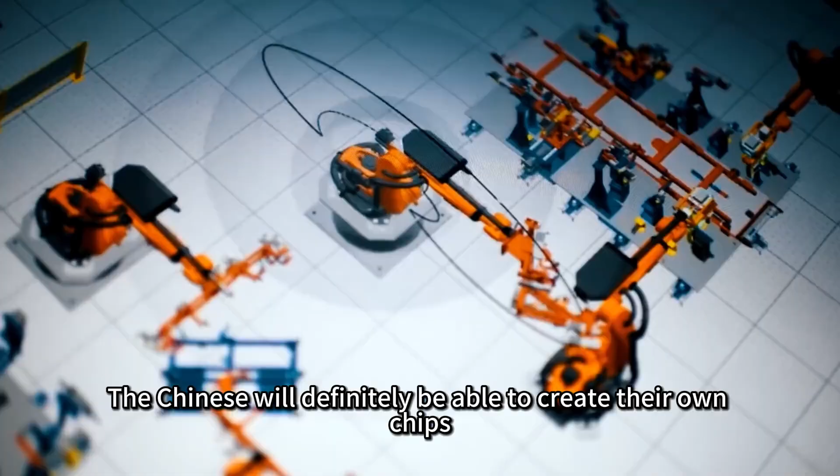The Chinese will definitely be able to create their own chips, now that our country is under a technological blockade by the United States. Coupled with its late start, we may not be able to achieve very high achievements in the chip industry in a short period of time, but I believe that one day the Chinese will be able to break through the technical barriers of the United States and create unique Chinese chips.